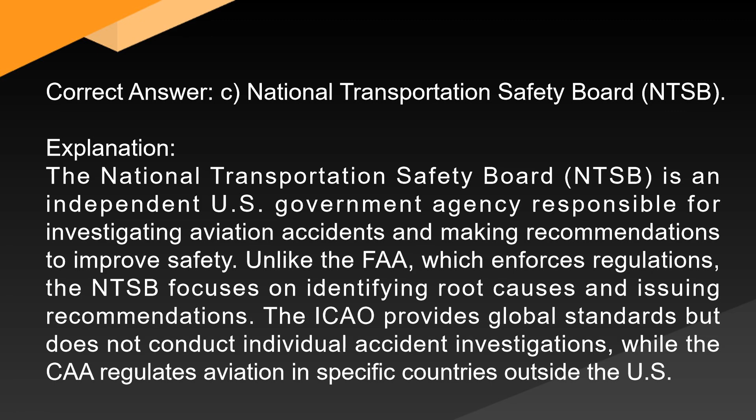Question 3. Captain Mitchell, an experienced airline pilot, notices an increasing number of flight deviations due to pilots misunderstanding ATC instructions. He raises this concern to the airline safety department. According to ICAO's Safety Management System, SMS, principles, what should the airline do next? A. Conduct disciplinary actions against the pilots to enforce stricter compliance. B. Implement a safety risk assessment to identify underlying causes. C. Ignore the issue, as no major incidents have occurred yet. D. Report the issue directly to ATC and expect them to correct their procedures.

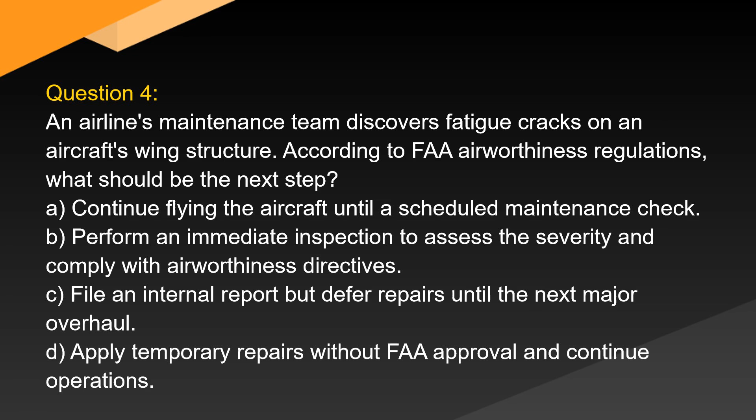Question 4. An airline's maintenance team discovers fatigue cracks on an aircraft's wing structure. According to FAA airworthiness regulations, what should be the next step? A. Continue flying the aircraft until a scheduled maintenance check. B. Perform an immediate inspection to assess the severity and comply with airworthiness directives. C. File an internal report but defer repairs until the next major overhaul. D. Apply temporary repairs without FAA approval and continue operations.

Correct answer: B. Perform an immediate inspection to assess the severity and comply with airworthiness directives. Explanation: fatigue cracks are serious structural issues that can compromise an aircraft's integrity. The FAA mandates immediate action, including thorough inspection and compliance with relevant airworthiness directives, ADs, or manufacturer-recommended repairs. Delaying action or applying unauthorized repairs could result in regulatory violations and safety risks.

Question 5. Which of the following is a primary objective of an aircraft's continuing airworthiness program? A. To ensure the aircraft complies with operational regulations, but not necessarily maintenance standards. B. To manage the operational efficiency of an aircraft without strict regulatory oversight. C. To maintain an aircraft in an airworthy condition through inspections, repairs, and modifications. D. To certify new aircraft models for commercial service. Correct answer: C. To maintain an aircraft in an airworthy condition through inspections, repairs, and modifications.

Explanation: a continuing airworthiness program, as per ICAO and FAA regulations, is designed to ensure an aircraft remains airworthy throughout its operational life. This includes scheduled inspections, maintenance, adherence to service bulletins, and modifications as required. It is distinct from aircraft certification, which applies to new models before entry into service.

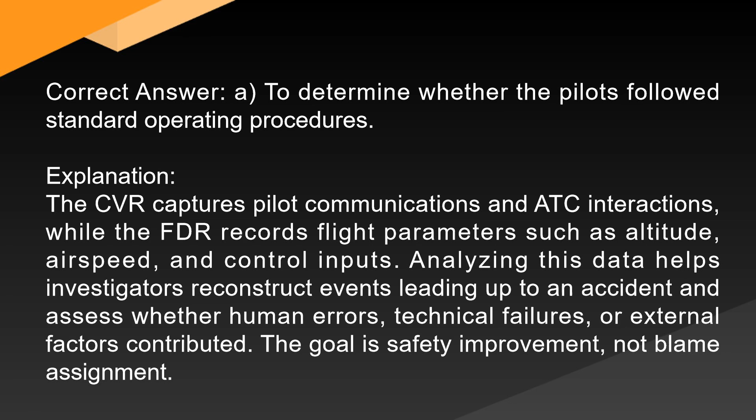Explanation: ICAO Annex 13 specifies that the investigating authority must be notified immediately and the accident site secured to preserve evidence. This prevents tampering and ensures accurate data collection. Only after securing the site can forensic analysis, interviews, and cause determination begin.

Question 9. An airline safety management system, SMS, identifies a recurring issue with aircraft maintenance discrepancies not being documented properly. As an aviation safety inspector, what is the best course of action to address this issue? A. Recommend additional training for maintenance personnel on proper documentation procedures. B. Immediately revoke the airline's maintenance approval certificate. C. Suspend all flight operations until all discrepancies are resolved. D. Ignore the issue, as minor discrepancies are common in large-scale operations.

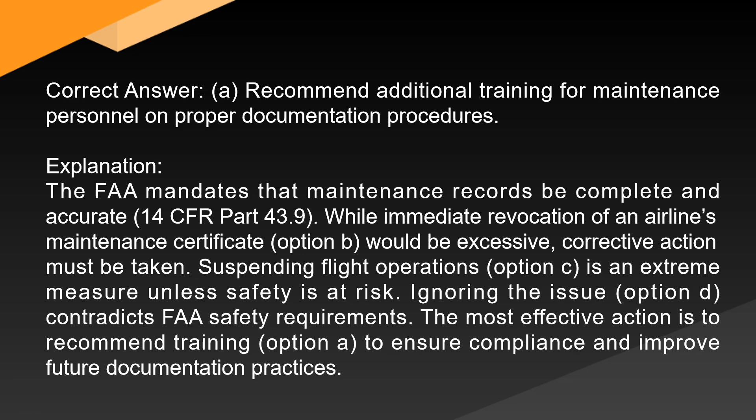Question 10. During a ramp inspection, an aviation safety inspector finds that an aircraft is missing a required emergency exit sign. The aircraft is scheduled for departure in 30 minutes. What should the inspector do? A. Allow the aircraft to depart if the crew verbally confirms passengers have been briefed on exit locations. B. Require the airline to immediately install the missing sign before departure. C. Report the issue, but allow the flight to continue since it is a minor defect. D. Allow the flight to proceed and issue a warning to the airline for corrective action. Correct answer: B. Require the airline to immediately install the missing sign before departure.

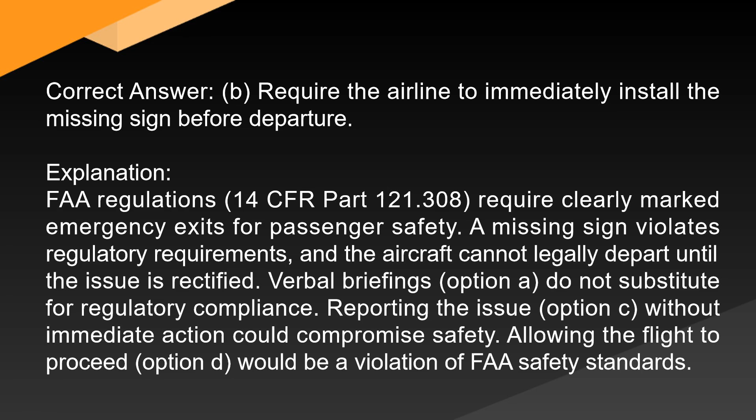Explanation: FAA Regulations 14 CFR Part 121.308 require clearly marked emergency exits for passenger safety. A missing sign violates regulatory requirements, and the aircraft cannot legally depart until the issue is rectified. Verbal briefings, option A, do not substitute for regulatory compliance. Reporting the issue, option C, without immediate action could compromise safety. Allowing the flight to proceed, option D, would be a violation of FAA safety standards.

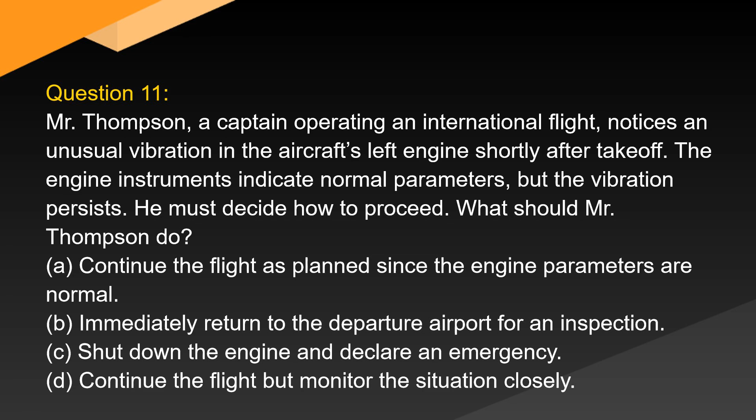Question 11. Mr. Thompson, a captain operating an international flight, notices an unusual vibration in the aircraft's left engine shortly after takeoff. The engine instruments indicate normal parameters, but the vibration persists. He must decide how to proceed. What should Mr. Thompson do? A. Continue the flight as planned since the engine parameters are normal. B. Immediately return to the departure airport for an inspection. C. Shut down the engine and declare an emergency. D. Continue the flight but monitor the situation closely. Correct answer: B. Immediately return to the departure airport for an inspection.

Explanation: Safety regulations prioritize precautionary measures in uncertain situations, FAA 14 CFR Part 91.7, Aircraft Airworthiness. Although engine instruments may appear normal, an unusual vibration could indicate a developing mechanical issue. The safest option is to return to the departure airport for an inspection, option B. Shutting down the engine, option C, without further assessment may be unnecessary and could reduce aircraft controllability. Continuing the flight, options A and D, without resolving the issue could increase risk.

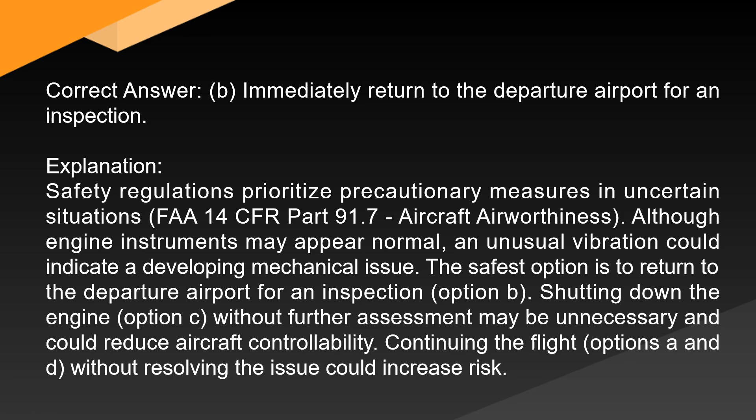Question 12. Which of the following is a primary function of an aviation safety inspector, ASI, in overseeing air carrier operations? A. Conducting surprise in-flight cockpit observations without informing the crew. B. Evaluating airline compliance with FAA regulations and safety management systems. C. Directly managing airline maintenance personnel to ensure compliance. D. Developing new regulations independently without FAA approval. Correct answer: B. Evaluating airline compliance with FAA regulations and safety management systems.

Explanation. Aviation safety inspectors, ASIs, are responsible for ensuring airline compliance with FAA regulations, 14 CFR Parts 119, 121, and 135. They evaluate flight operations, maintenance programs, and SMS effectiveness. Conducting surprise in-flight observations, option A, is not a standard ASI practice. ASIs do not directly manage airline personnel, option C, or create independent regulations, option D.

Question 13. An aviation safety inspector conducting an accident investigation needs to analyze data from a flight data recorder, FDR. What is the correct process? A. Extract and analyze the data independently without airline involvement. B. Coordinate with the NTSB and specialized laboratories for data analysis. C. Allow the airline's maintenance team to interpret the data for efficiency. D. Review only written maintenance logs, as FDR data is not required for most investigations. Correct answer. B. Coordinate with the NTSB and specialized laboratories for data analysis.

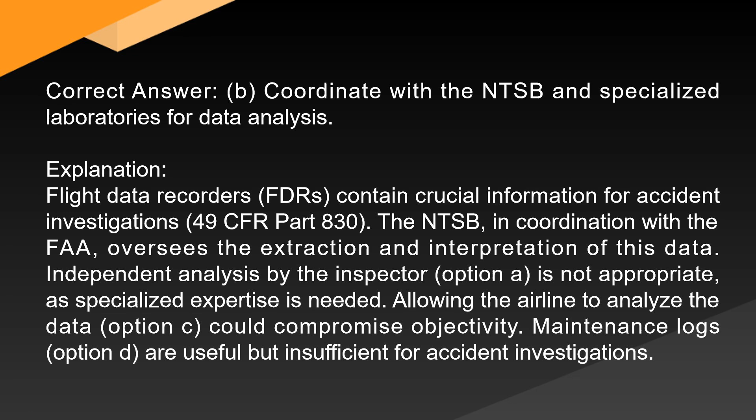Question 14. Which factor is most likely to contribute to a controlled flight into terrain, CFIT, accident? A. Pilot fatigue and reduced situational awareness. B. Clear weather and favorable wind conditions. C. Aircraft systems operating without malfunctions. D. Strict adherence to flight automation. Correct answer. A. Pilot fatigue and reduced situational awareness.

Explanation. Controlled flight into terrain, CFIT, accidents often result from human factors, including fatigue and situational awareness loss, FAA AC 61-134. CFIT occurs when a pilot inadvertently flies a properly functioning aircraft into terrain. Good weather, option B, does not prevent CFIT if situational awareness is compromised. Automation reliance, option D, can contribute to CFIT if pilots become complacent.

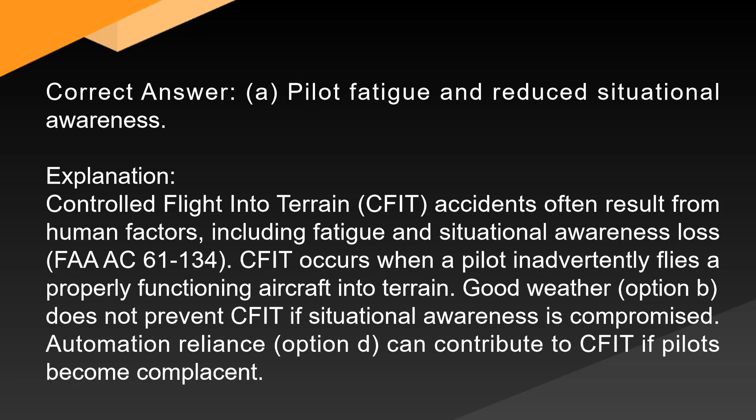Question 15. Aviation inspectors are reviewing an airline's emergency response plan. Which of the following must be included? A. Documented procedure for passenger compensation. B. Coordination strategies with local emergency services. C. A detailed explanation of airline marketing strategies. D. A method for minimizing flight delays during emergencies. Correct answer. B. Coordination strategies with local emergency services.

Explanation. Emergency response plans must include coordination with local emergency services, airport authorities, and regulatory agencies. FAA Advisory Circular 150/5200-31C. Passenger compensation, option A, and marketing, option C, are not relevant to safety response. Flight delays, option D, are secondary to emergency management.

Question 16. Which of the following is a primary consideration for an aviation safety inspector when evaluating an air carrier's maintenance program? A. Ensuring that the airline maintains its aircraft to the highest cosmetic standards. B. Verifying the airline follows a manufacturer-approved maintenance schedule. C. Checking that the airline has the lowest maintenance costs among its competitors. D. Confirming that the airline only performs maintenance during off-peak hours to minimize downtime. Correct answer. B. Verifying the airline follows a manufacturer-approved maintenance schedule.

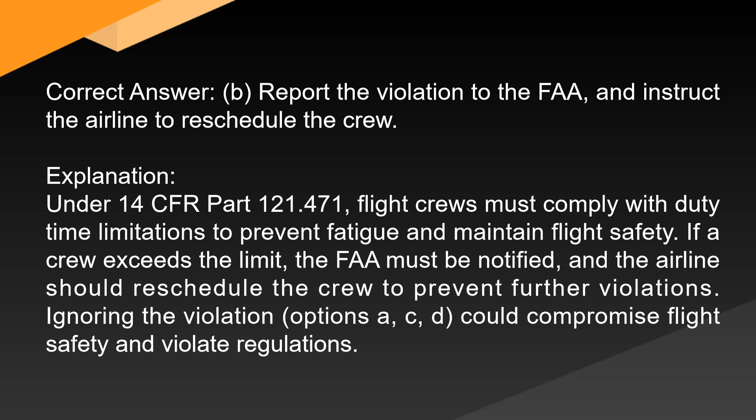Question 18. Which of the following is the primary responsibility of an aviation safety inspector during an aviation accident investigation? A. To assign blame for the accident. B. To prevent further accidents from occurring through immediate regulatory action. C. To gather evidence and provide technical expertise to the investigation team. D. To ensure that passengers receive compensation for their injuries. Correct answer. C. To gather evidence and provide technical expertise to the investigation team.

Explanation. The role of an aviation safety inspector during an accident investigation is to provide technical expertise and assist in gathering evidence, 49 CFR Part 830. The goal is to understand the cause of the accident to prevent future occurrences, not to assign blame, option A, or handle compensation issues, option D, which fall under different procedures.

Immediate regulatory action, option B, may be necessary later, but it is not the primary responsibility during the investigation.

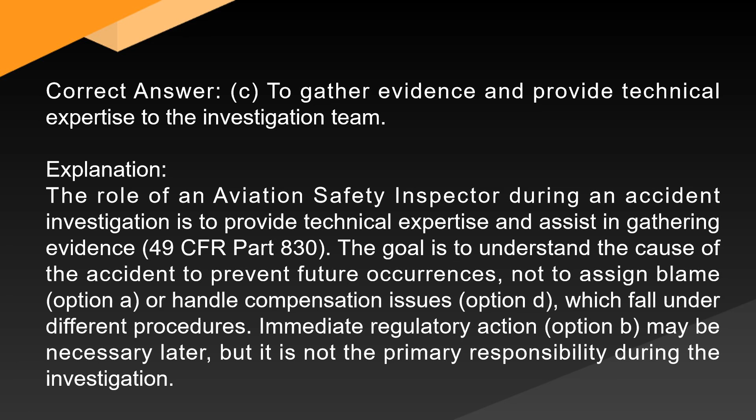Question 19. Which document should an aviation safety inspector refer to when determining if an aircraft is compliant with airworthiness directives? A. The airline's operations manual. B. The aircraft's maintenance logbook. C. The aircraft's certificate of registration. D. The manufacturer's operating manual. Correct answer: B. The aircraft's maintenance logbook.

Explanation. The maintenance logbook documents compliance with airworthiness directives (ADs), which are mandatory for aircraft safety and compliance, 14 CFR Part 39. It includes records of repairs, modifications, and inspections. The operations manual option and certificate of registration option C are useful but do not track AD compliance. The manufacturer's manual, option D, provides guidance on aircraft operation, not compliance with regulations.

Question 20. An aviation safety inspector is reviewing an airline safety management system, SMS. The airline has identified several hazards but has not yet implemented mitigation strategies. What should the inspector recommend? A. The airline should immediately stop operations until mitigation strategies are in place. B. The airline should conduct a risk assessment to prioritize hazards and implement mitigation strategies. C. No action is necessary since identifying hazards is sufficient for compliance. D. The airline should only mitigate the highest risk hazards, ignoring lower-level concerns.

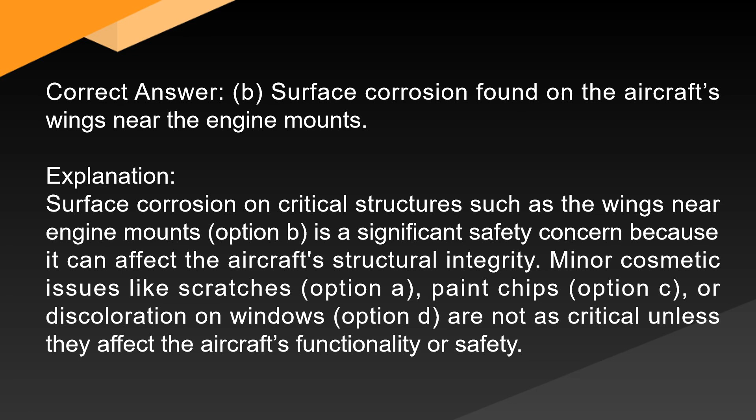Explanation. Surface corrosion on critical structures such as the wings near engine mounts, option B, is a significant safety concern because it can affect the aircraft's structural integrity. Minor cosmetic issues like scratches, option A, paint chips, option C, or discoloration on windows, option D, are not as critical unless they affect the aircraft's functionality or safety.

Question 23. Ms. Richards is conducting a ramp inspection at a regional airport and notices that the aircraft's pitot tube cover is still in place, despite the fact that the aircraft is about to depart. The pilot confirms they forgot to remove it. What action should Ms. Richards take? A. Allow the aircraft to proceed, as this is a common oversight. B. Immediately ground the aircraft until the pitot tube cover is removed and inspected. C. Issue a warning to the crew and allow the flight to proceed with a delayed departure. D. Report the issue to the FAA, but do not take any immediate action.

Correct answer: B. Immediately ground the aircraft until the pitot tube cover is removed and inspected. Explanation. The pitot tube is critical for airspeed measurements, and a cover left on it can lead to inaccurate readings, endangering flight safety, 14 CFR Part 91.205. This is a serious oversight that must be corrected before the flight departs. Allowing the aircraft to proceed, options A and C, or reporting the issue without action, option D, would compromise safety.

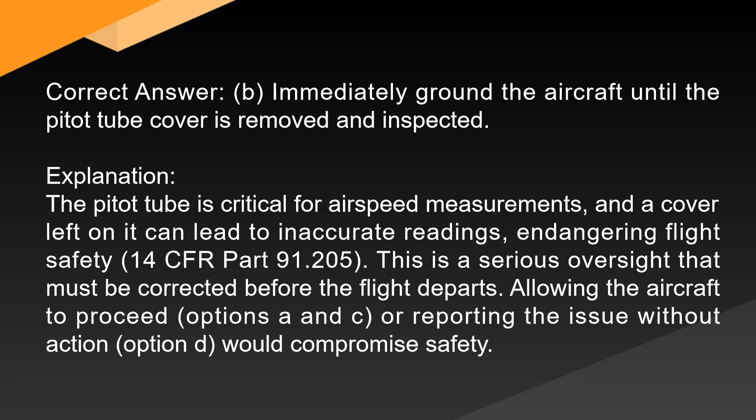Question 24. Which of the following is a key component of an effective flight crew training program? A. Emphasis on routine procedures to ensure pilots maintain proficiency. B. Focus on maximizing the use of flight automation to reduce pilot workload. C. Simulations of emergency and non-routine scenarios to test decision-making under pressure. D. Prioritizing theoretical knowledge over practical skills. Correct answer: C. Simulations of emergency and non-routine scenarios to test decision-making under pressure. Explanation.

Flight crew training must emphasize practical, real-world scenarios, especially emergencies, to ensure pilots are prepared for high-pressure situations. FAA AC 120-35B. Routine procedures, option A, and automation, option B, are important, but emergency simulations, option C, are crucial for developing strong decision-making skills. Prioritizing theory over practical skills, option D, would not adequately prepare pilots for the challenges they will face in real

operations. Question 25. What is a primary objective of the FAA's accident investigation procedures? A. To determine who was at fault for the accident. B. To gather evidence that can be used in legal proceedings. C. To identify safety issues and prevent future accidents. D. To assess the financial impact of the accident on the airline involved.

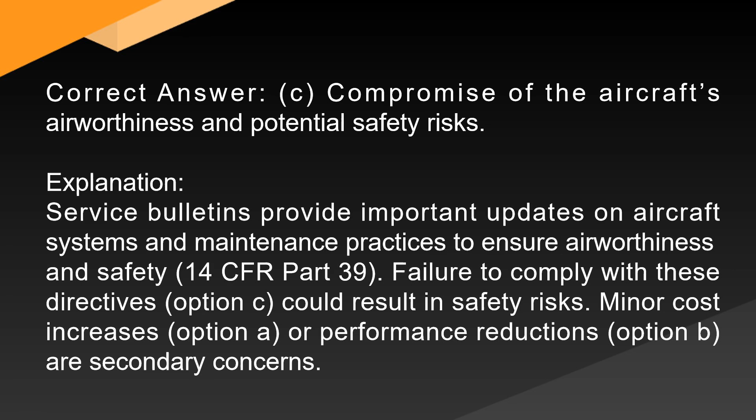Question 27. Which of the following is an essential requirement for an aircraft to be considered airworthy under FAA regulations? A. The aircraft must meet the manufacturer's specifications and all applicable airworthiness directives. B. The aircraft must have the most up-to-date avionics installed. C. The aircraft must have a paint job that meets the latest aesthetic standards. D. The aircraft must operate at the highest possible fuel efficiency.

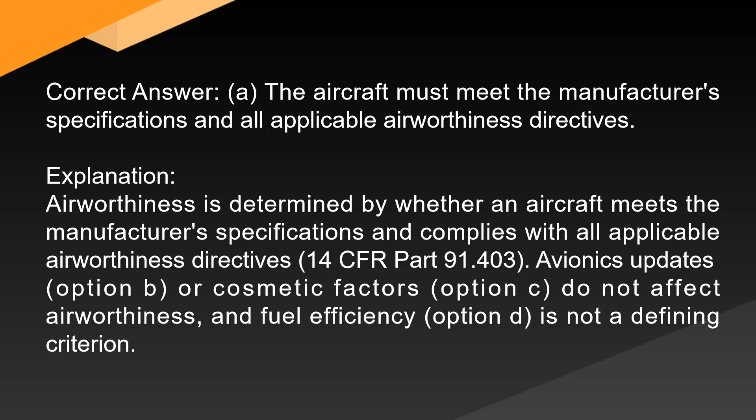Correct answer: A. The aircraft must meet the manufacturer's specifications and all applicable airworthiness directives. Explanation: airworthiness is determined by whether an aircraft meets the manufacturer's specifications and complies with all applicable airworthiness directives. 14 CFR Part 91.403. Avionics updates, option B, or cosmetic factors, option C, do not affect airworthiness, and fuel efficiency, option D, is not a defining criterion.

Question 28. During a safety audit, an aviation safety inspector discovers several incomplete or inaccurate maintenance records. What should the inspector do? A. Allow the airline to continue operations, as minor record discrepancies are common. B. Immediately suspend the airline's operating certificate. C. Require corrective action and verify that maintenance records are brought into compliance. D. Ignore the discrepancies if they do not appear to have affected the aircraft's safety.

Correct answer: C. Require corrective action and verify that maintenance records are brought into compliance. Explanation: accurate and complete maintenance records are required under 14 CFR Part 43.9. Inaccuracies or omissions must be corrected promptly. Allowing operations to continue, option A, or ignoring the discrepancies, option D, would violate regulatory standards. Suspending operations, option B, is a drastic measure and should only be considered if the issue compromises safety.

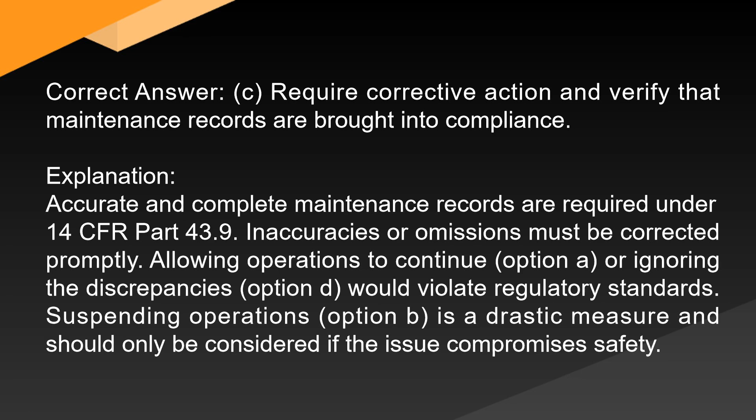Question 29. Which of the following actions should an aviation safety inspector take if they observe unsafe flight crew behavior during an operational inspection? A. Immediately arrest the crew members. B. Allow the crew to continue the flight and report the behavior afterward. C. Ground the aircraft and remove the crew from duty until further investigation. D. Issue a warning and allow the crew to continue the flight with heightened supervision.

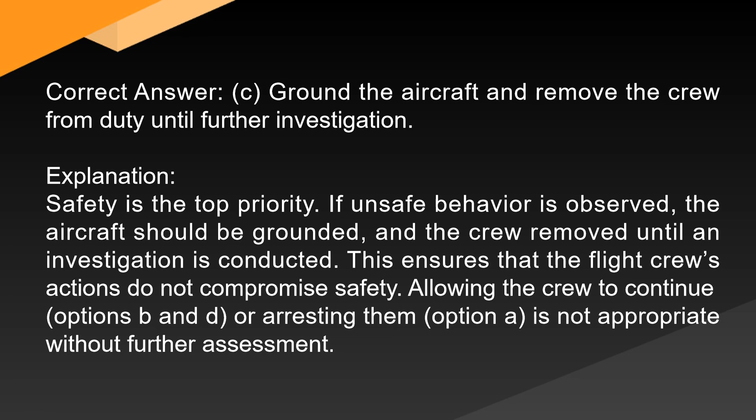Correct answer: C. Ground the aircraft and remove the crew from duty until further investigation. Explanation: safety is the top priority. If unsafe behavior is observed, the aircraft should be grounded and the crew removed until an investigation is conducted. This ensures that the flight crew's actions do not compromise safety. Allowing the crew to continue, options B and D, or arresting them, option A, is not appropriate without further assessment.

Question 30. Which of the following would likely require an aviation safety inspector to issue an emergency airworthiness directive? A. A newly discovered defect that poses an immediate threat to safety. B. A routine safety recommendation that can be addressed at the next scheduled inspection. C. An issue that could potentially affect the aircraft's fuel efficiency. D. A minor cosmetic defect that does not affect aircraft operation.

Correct answer: A. A newly discovered defect that poses an immediate threat to safety. Explanation: an emergency airworthiness directive is issued when a safety issue is discovered that poses an immediate threat to flight safety, 14 CFR Part 39. Routine recommendations, option B, efficiency concerns, option C, and cosmetic defects, option D, do not typically warrant emergency action.